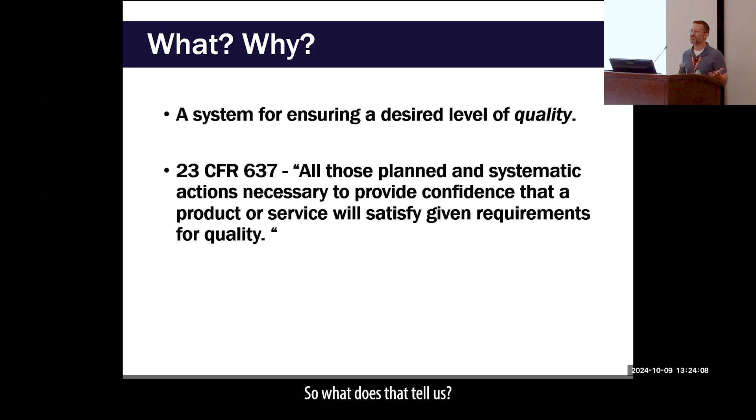So, what is quality assurance? At its simplest, it is a system for ensuring the desired level of quality required by the Code of Federal Regulations. The FHWA requires all of this, and it's all of those planned and systematic actions necessary to provide confidence that a product or service will satisfy given requirements for quality. So what is that telling us? It's basically just a fancy way of saying we want to get what we pay for.

So we make references to sampling and testing. It is not just sampling and testing, but this is an entire program. It's a cycle here. Your personnel, are they qualified? Do they know, have they been trained? Is that training documented? Do they have what they need to take proper samples and run these tests?

Is your equipment in good working order? Has it been calibrated? Do the people know how to run the equipment? And is all that documented? And then finally, the eyes on the road at the end. A passing test does not substitute for a failing inspection. So the inspection is just as important as any of the testing that you're going to run.

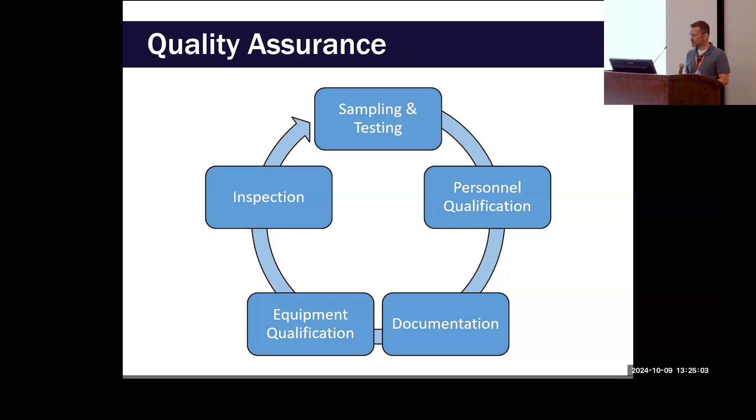So we have a lot of references to QA. We'll start with the Louisiana standard specs. I always make reference to section 106, which is control of materials. It gives you kind of a 30,000 foot overview of who is responsible for sampling, who's responsible for the materials, what certificates are required on certain parts of the job.

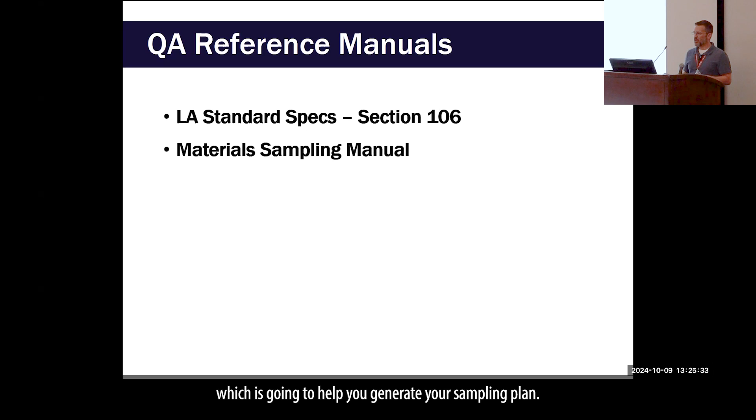The materials sampling manual is going to help you generate your sampling plan. This is divided up by contract item and gives you frequencies, the requirements of how much you sample, when you sample, and any remarks in there. Again, this will help you generate a sampling plan specific for your project, which is going to be based on the bid estimates in your contract.

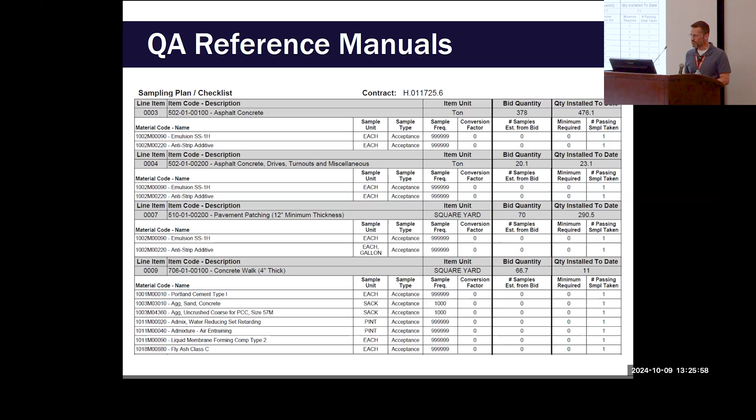We make a lot of references to AASHTO specifications, ASTM specifications, which are all national. We have some of our own procedures detailed in the testing procedures manual, or if we make modifications to some of these national tests, then we may write our own TR, we call them, which I found out means testing and reporting. That was a fun question to get into. But we will make a TR for those modifications or our own test procedures.

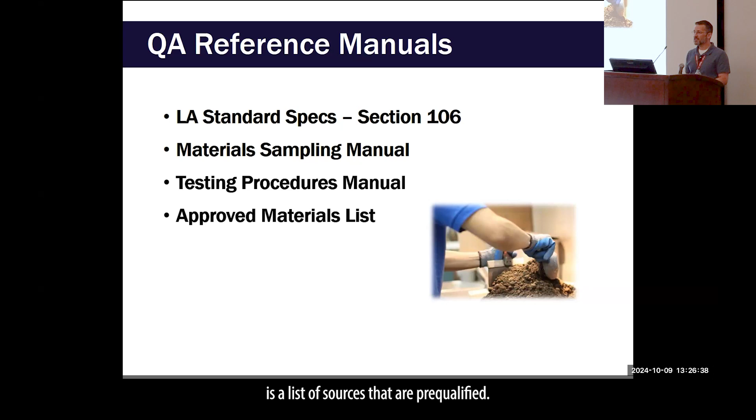The approved materials list is a list of sources that are pre-qualified. It's not blanket approval. We'll still have to use the sampling manual to test them at the proper frequencies. But it shows that these are a number of companies that are capable of producing materials meeting our specifications, but again, not blanket approval.

And then at the end of the project, the audit of testing and materials, which is EDSM III.5.1.2. This used to be called the 2059. If anybody's worked on those before, we just changed it to audit of testing and materials.

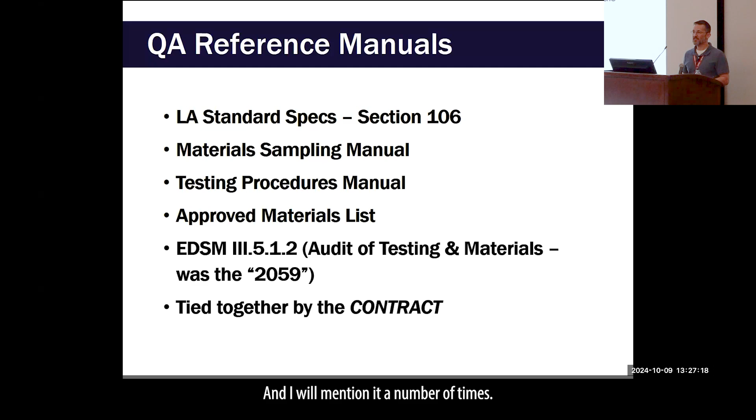And these are all tied together by the contract. And I will mention it a number of times. And as Mary said, read your contract. The contract will have specification changes. And it actually says it right here, the standard specifications together with any supplemental and special provisions.

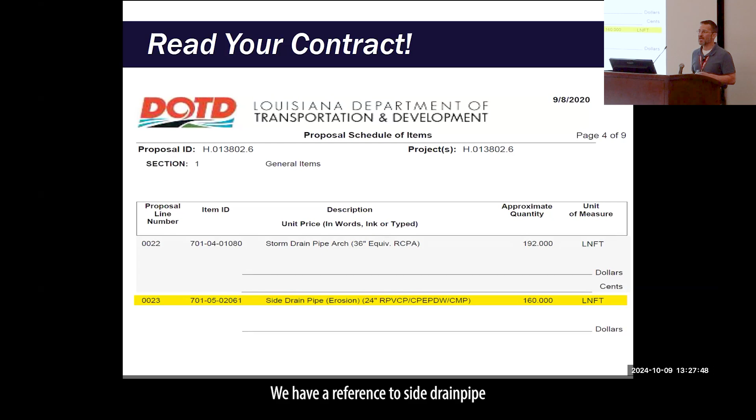And sometimes we will make changes here in just a proposal of a schedule of items. We have a reference to side drain pipe, and that makes reference to double wall polyethylene pipe. So if we look in the contract, we have a special provision that says for culverts and storm drains, that 701 item, use of polyethylene pipe, polypropylene pipe is an acceptable substitute. And then we have the material specification 1006, which has been modified to include the polypropylene pipe reference to AASHTO M330.

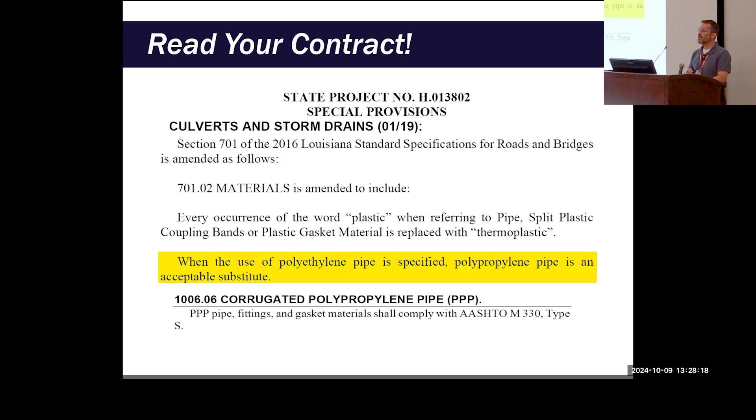And in some cases, there's a lot of changes. We may have a complete revision of the specification. The Purple Book, Part 5, is no longer valid. There was a specification change in August of 2018 that completely replaced Section 5. So if you have anything asphalt, don't go by the Purple Book.

It is the shellback's turn.

What do you think? False? Okay, click it. False, correct. Excellent.

Is this recording loud enough? I can't hear anything, but. Yeah, you're good. Okay, keep going.

You're good. So all of our contracts have the Buy America iron and steel provisions, including coatings. And this, of course, leads into the more fun Buy America, Build America.

That's changing a number of things. This covers steel and iron still, but it also covers construction materials and manufactured products. And depending on what category these materials are in, manufactured products, I think, have to be 55% of the cost manufactured in the United States, and construction products are 100% manufactured. I can't remember either. There's a whole bill and law on that, and it explains it clear as mud.

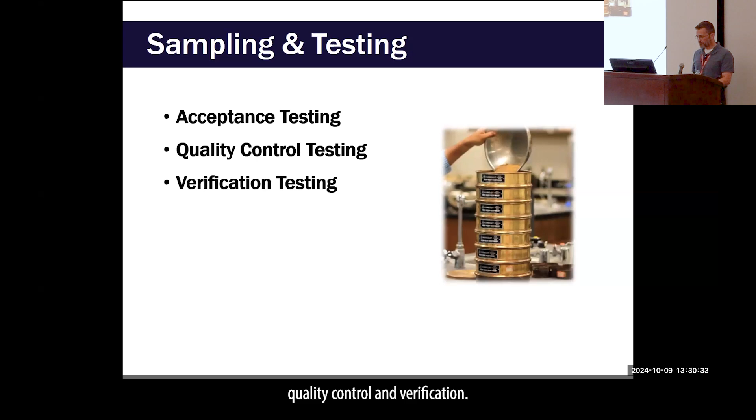So we'll go a little bit into sampling and testing. The three main types that you'd be dealing with will be acceptance, quality control, and verification. So acceptance testing is performed by DOTD, or our owner representative, which would be you, and that's what's controlling pay.

In some cases, material may pass, or if it's not passing, to what degree is it meeting the specifications? Is it something that we would apply a pay penalty to, or remove it and replace it with passing material? Depending on the degree of departure from the specification, it could be a very expensive fix. So another reason of ensuring that everybody knows what they're doing, that all of your equipment is in working order.

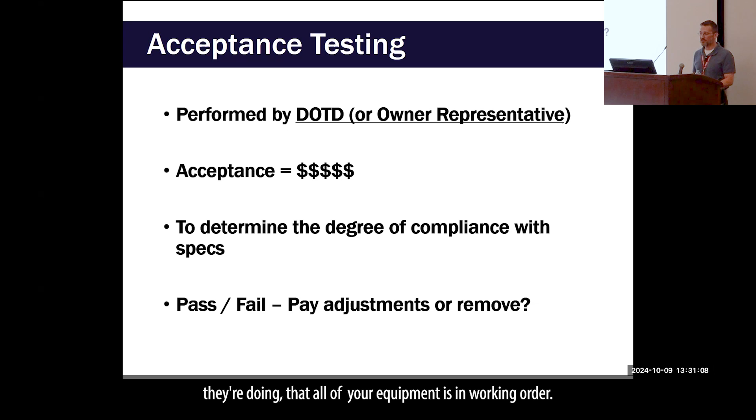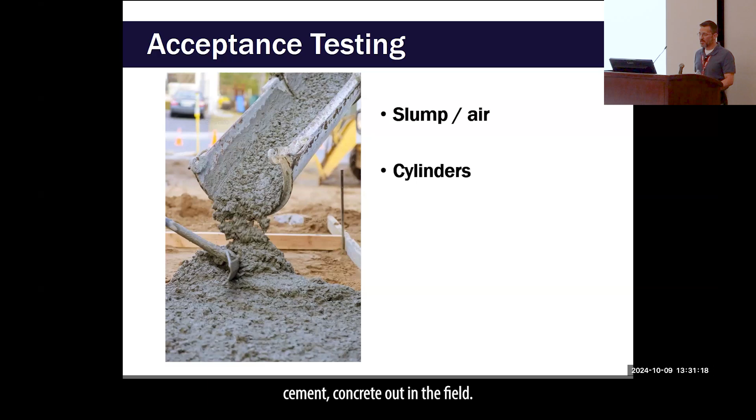So some examples of acceptance testing would be slump and air on cement, concrete out in the field, and making those cylinders. In some cases, we would accept materials on a certificate of delivery, which means that the batch that's arrived on your project has been pre-approved by the department.

So quality control testing is done by the contractor, and this is the way he adjusts his process to keep within the specification limits. He can make adjustments as necessary to control its quality and hopefully give us a more consistent product. If a process that he's doing is more variable, he may need to run more tests to ensure that he stays within the tolerance limits.

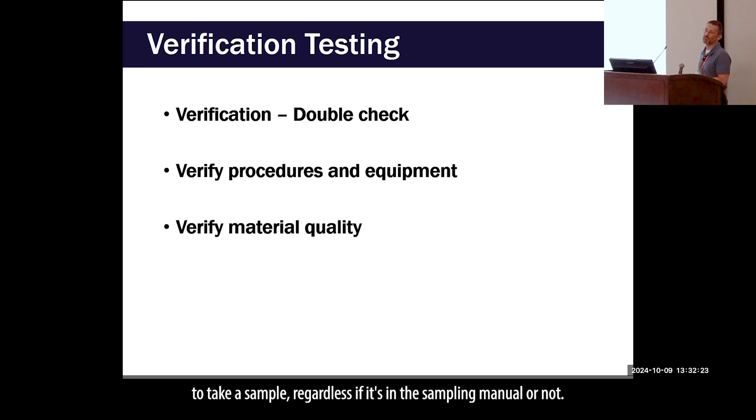And then verification testing is our chance to have a second look. This would be if we have questions on procedures, equipment, the quality of the sample. Did something not look right? We always have the ability to take a sample regardless if it's in the sampling manual or not. We can always stop and say, we want another sample of this. And if something's not verifying, that may warrant additional testing or investigation.

And some examples of this would be emulsified asphalt, tack coats. If you're dealing with this, you'll generally be accepting the materials on a certificate of delivery at the project site, but we take one per project just to maintain a view of the material quality.

And one thing that I want to note here on tack coat, we've got a nice laydown of the tack coat across the entire roadway. The distributors are set really well, so this guy's got it right. If we test this material and it's the best material that you've ever had, but the contractor is spraying it in streaks down the roadway, then all of that testing does absolutely no good.

So again, passing test doesn't substitute for a failing inspection. Your inspectors are just as important in this process as anybody else. So, and again, if something's questionable, question it. Take those samples and make those calls.

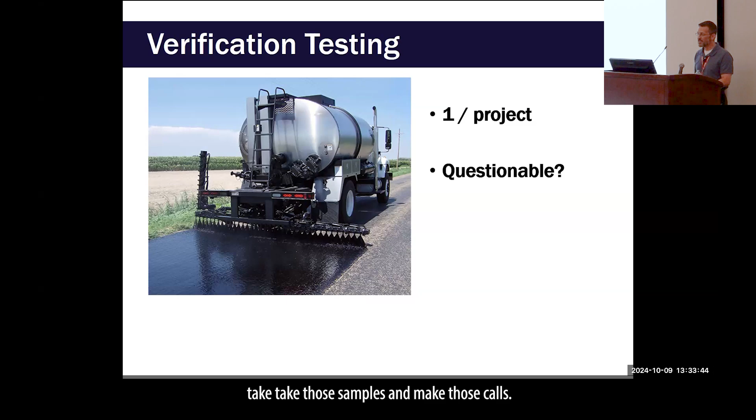Another, Portland cement. Yes, we accept these on certificates of compliance, but we still take one per project just to keep everybody honest. And the verification testing is generally done by DOTD, but again, you can always take a sample if anything is in question.

Okay, it's the urchin's turn. The QC, quality control testing, is performed by the contractor to monitor, etc. What do you think? Last row. True. We saying true? Okay, they're saying true. They are correct. Very good.

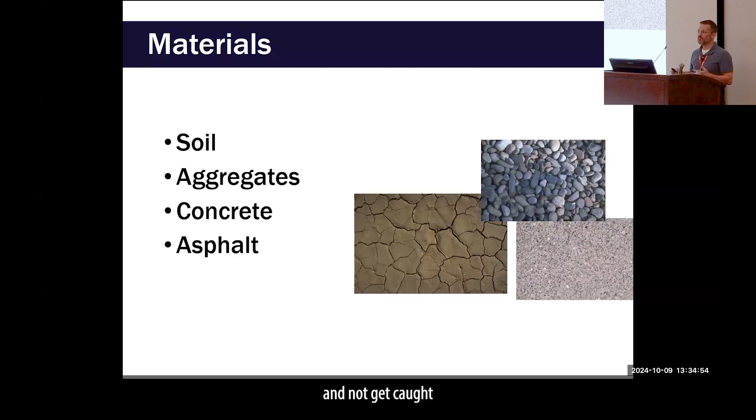So I'm going to get into a little bit of materials. I'm prefacing this, you may not have all or any of these materials on your project. This is just to kind of give an overview of the scope of the different testing that may be involved in your projects, things to think about to stay ahead and not get caught last minute needing test results.

We have a lot of different tests that are performed at different labs for various reasons. So again, read your contract beforehand and get an idea of this. Like concrete and asphalt, if you're dealing with these, we require everything to come from certified plants, which DOTD certifies every 2 years.

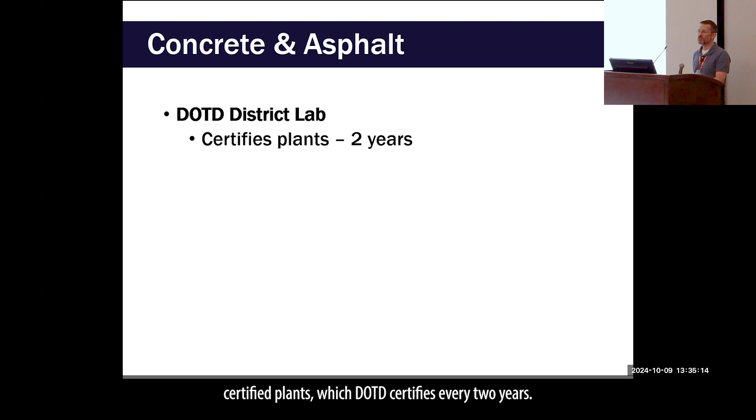Our district labs would approve mix designs for asphalt and concrete. And sometimes those can take some back and forth to make sure everything's correct there.

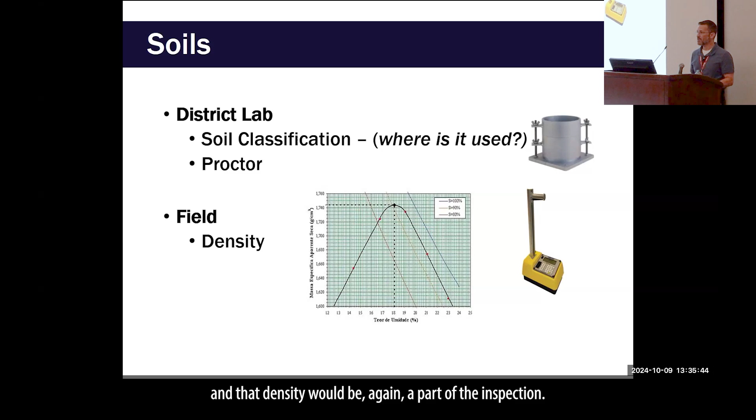Our district labs would perform soil classifications and moisture density relationships, Proctor. But then we'll take a density in the field, and that density would be, again, a part of the inspection. You've got something like a pipe, and you want to make sure that the haunches of that pipe have proper density around them. If you don't have good compaction around them, you're not going to have a good pipe installation, especially with plastic pipe.

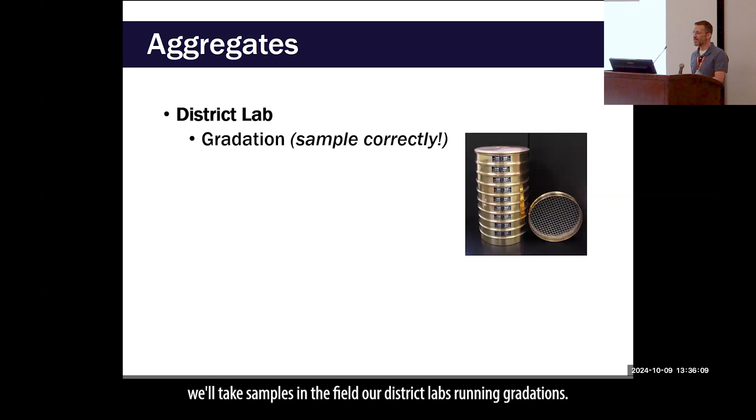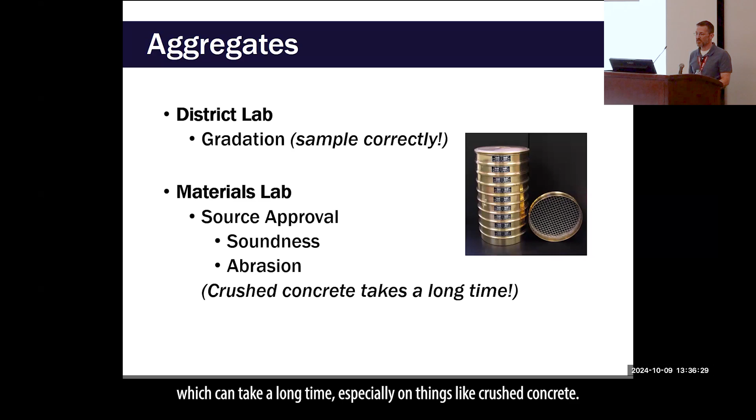So for aggregates, we'll take samples in the field. Our district labs run gradations. The sampling manual will have typical testing times on some of these, so you can get an idea of how long some of these materials would take. If there's a new source or something that's really questionable, the materials lab would test for source approval and run things like soundness and abrasion, which can take a long time, especially on things like crushed concrete. So again, plan ahead if you need to do any of these.

For concrete, our district lab runs compressive strengths. Again, in the field, you'll do slump and air for acceptance. And then if DOTD is involved in some of the testing, there may be cement, fly ash. That would all go to the materials lab for verifications of any of those.

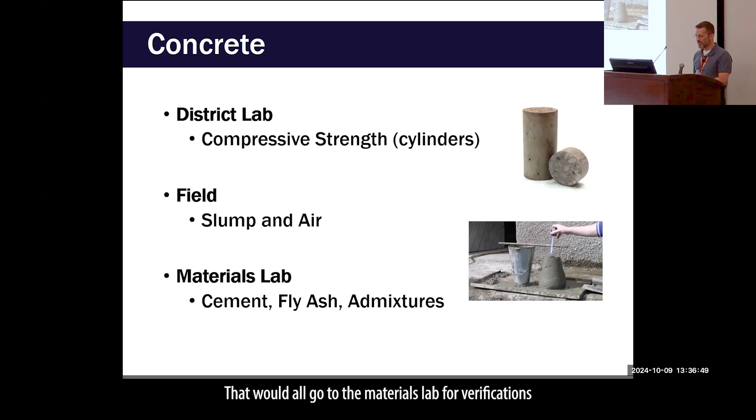Question? A lot of times JMFs and concrete mix designs are being approved prior to NTP or anything like that, or at least early on in the project. If we were the LPA's project engineer, are we responsible for approving those mix designs?

DOTD is our testing laboratory, for the testing of materials and the approval of mix design. I think that will be something discussed at a pre-con or before everything is signed over. I'm not exactly sure who would be responsible for that, but I would imagine that will be something discussed beforehand.

We've had some contracts for CE&Is where the owner representative is responsible for everything, and other times they're sending it to DOTD. So I think it's kind of however it's determined prior to the start of the project. I'm not exactly sure how to answer the question on that one, but I think that it's to be determined. Thank you.

So district labs will run grade check for asphalt cement by doing viscosity. And then in the field, we'll take cores for density, and after the project is over, they're going to run smoothness.

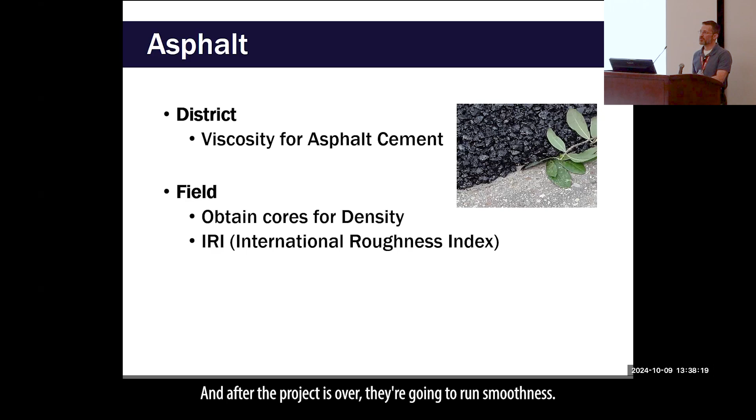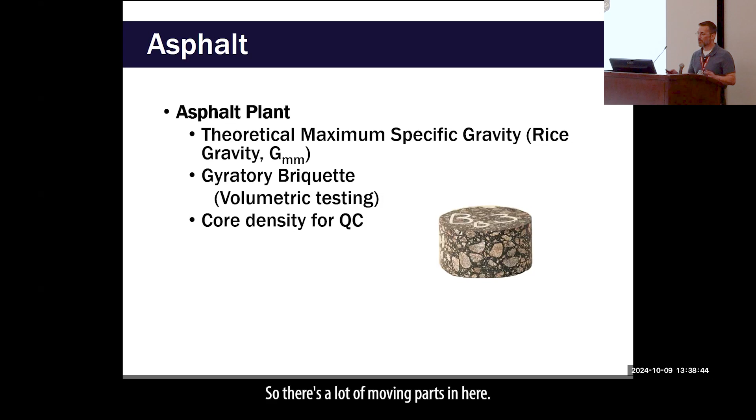The asphalt plant, there's a lot of QC data, QC testing that goes on to check that process at the plant. There's verifications done by DOTD at the plant. And then the cores that are taken for acceptance are sent to the district lab or sometimes run at the plant, but it's run by DOTD. So there's a lot of moving parts in here.

And then at the end, we've got the International Roughness Index, the IRI. And that's a team effort that's run by the contractor, submitted to the project engineer, and the contractor is certified for profilograph using DOTD to certify them.

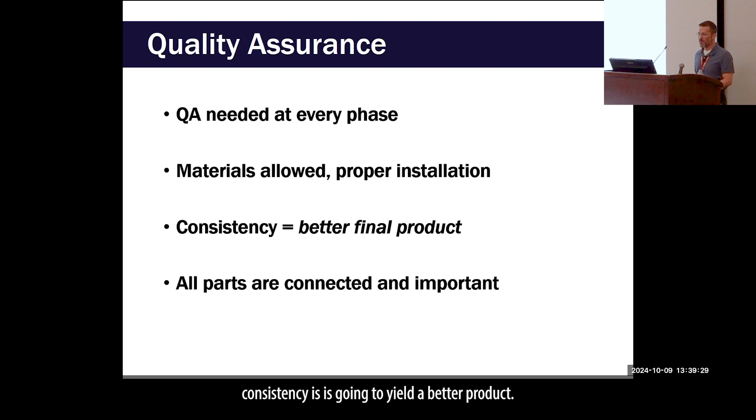So this is just kind of an idea that there's quality assurance at every phase of the project. It's all important. Be aware of what materials are going to be allowed on the project, what's a proper installation. We want better consistency, which is going to yield a better product, and all it takes is one broken gear to stop the machine. So everything is important. It all goes together.

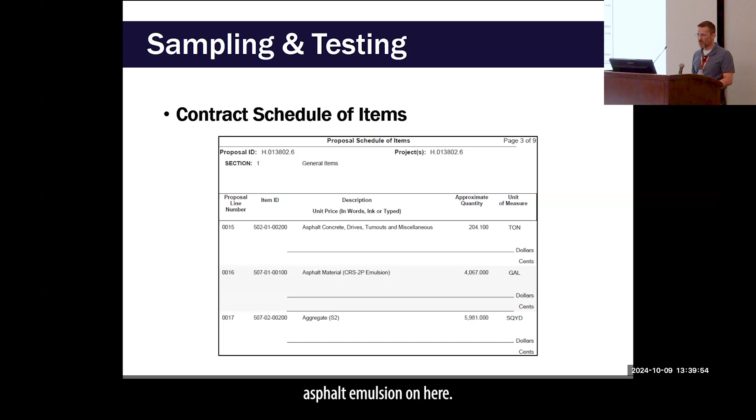I'm just kind of looking at here, we've got an example. Here's a contract schedule of items. We have, showing that, we got asphalt emulsion on here. We have aggregates. We have asphalt concrete.

So if we look at this, you can tell, if you look at the sampling manual and you connect the dots, you've got plant QC. The contractor's going to have to run plant QC on his asphalt concrete. We're going to have verification samples required in that, and then there's going to have to be field cores for acceptance for densities. And the aggregate, again, is your contractor using an approved source? Does he have a buddy down the field with a stockpile that isn't on our approved list? So is that going to have to be approved prior to him doing that?

So now you start getting all of this information. Okay, how do you record it? Matt kind of went into that. I'd like it to be Headlight, I think, depending on how Headlight turns out, but for right now we're still

dealing with Site Manager. It's kind of a work in progress on both ends. Site Manager is our database of record right now. Headlight will... are they working with Headlight now, or do you know? Oh, yeah, it's in progress. It's not done yet.

Matt and I were talking about it, a little bit of a state of flux. Matt said something about January potentially, and that seems ambitious, I thought, but he said to pilot the materials part in Headlight on some DOTD projects. That's what I thought he said, but from what I've seen, that will be very ambitious, but we'll see.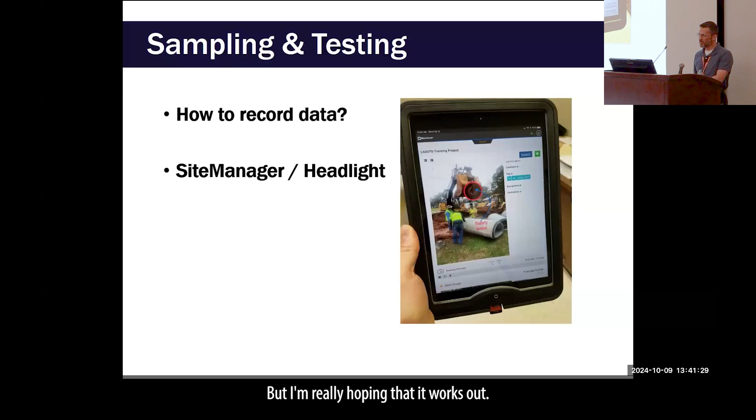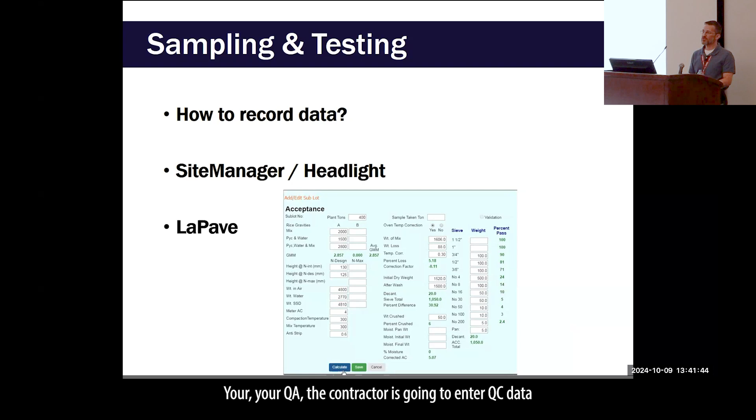I'm really hoping that it works out. So the other part of this for asphalt and concrete especially is going to be LaPave. LaPave is tied to Site Manager, and this is how you would handle your mix designs, your QA. The contractor is going to enter QC data into LaPave. If your people are not signed up for Site Manager, if they're not enrolled in that, and especially with LaPave,

talk to our automation team. We have training and stuff that they can give you on this, but just in general, from our main website, Business Construction Services, there's a DOTD system registration for Site Manager, some information that you'll fill out here. For LaPave access, there's this plant designer down here, and then choose your company name, or if it's not, you can click on it and register the company there.

Again, talk to our automation team. They will be able to walk you through this process, help get you set up, and give you training on Site Manager, give you training on LaPave. There's a lot of good information that they can help you with there, make it a lot easier.

So when you start taking these samples, we need to know some basic information. What are we testing? How much does it represent on the project? What are we testing it for? Is this an acceptance sample? Is this for pay? Is it for verification? Where is it coming from? And if it's a named product on the AML, what product is it? All of this gets entered into this very simple form here.

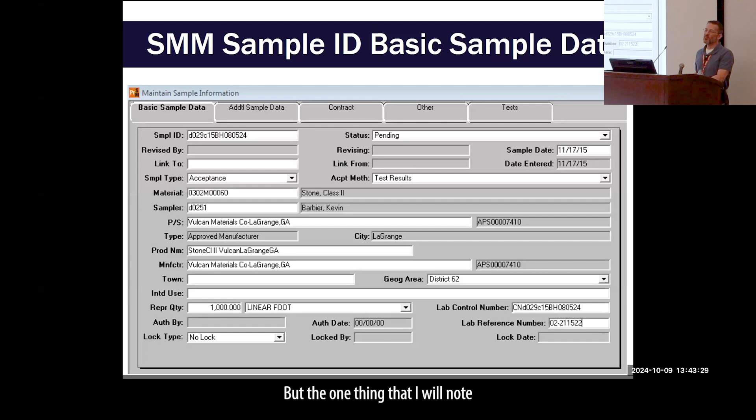Any of you have not worked with Site Manager before and have to, y'all are going to love this. I won't go into filling this out. I think Matt hopefully already did enough, good, somewhat. But the one thing that I will note is that when you get to the materials selection, test selection phase, we've set it up to accept default tests, set up to have the most general tests necessary for those projects. So unless there's something specific that you need for a verification, accept the default tests. It's much easier to add a test than it is sometimes to delete them.

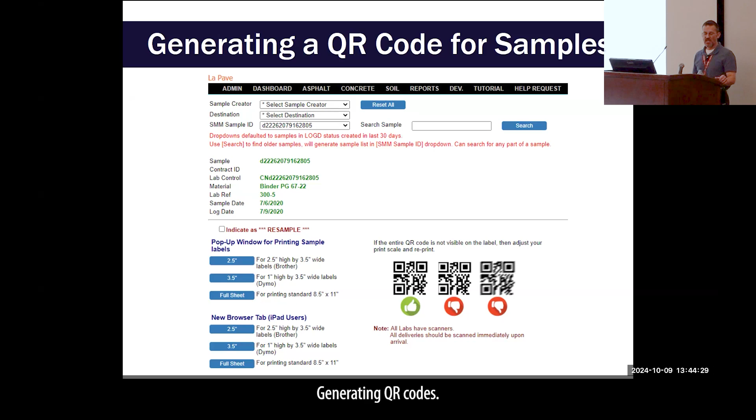So if materials are going to be sent to DOTD for testing, then for chain of custody, we're asking for everybody to use QR codes. And if you have access to our intranet site, on the Site Manager Materials Reports, there's a QR generator, but from our main Materials Lab website, sample QR code generator. Once you've created your sample in Site Manager, you'll be able to get to this page here, generating QR codes. And if something is a resample, there's even a box here to indicate that it's a resample.

That can give it a little higher priority. There are options to print on 2.5 and 3.5 inch labels, or full sheet. So depending on your setup, again, our automation team can give you recommendations of the right printers to use, which ones are the best quality to use. And I don't think they're that expensive, so it seems like slapping a sticker on these samples is quite helpful.

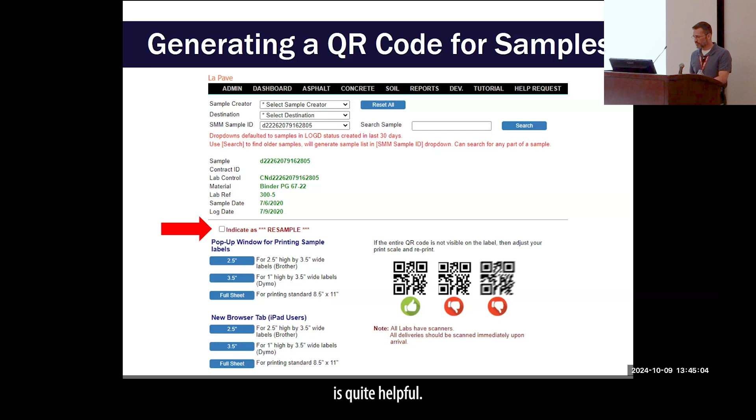So now we've got this proper information. We know what we're testing and why we're testing it. Just as important is to make sure that we've got that sample in enough time to get your test results prior to needing it on the project, and that it's representative.

We've got this QR code to help with the chain of custody. We take that sample, and we don't want to have the asphalt core rolling around in the back of a contractor's truck or somebody transporting it to a lab. The cylinders that you've taken so much time to prepare properly, and then they're thrown in the back of a truck or mishandled, and then our results aren't necessarily valid anymore. So we need to know who's going to be testing the samples, and how much time you have.

We have DOTD sampling procedures referenced from the sampling manual that cover equipment, handling, and labeling. Do you need, in this case for an aggregate, a shovel and a shield? You don't want to take a sample off the top of the stockpile—it's not representative, and that can delay your samples. Are you taking this from a stockpile, a barge, or a windrow somewhere? All of this should be covered in the sampling procedures.

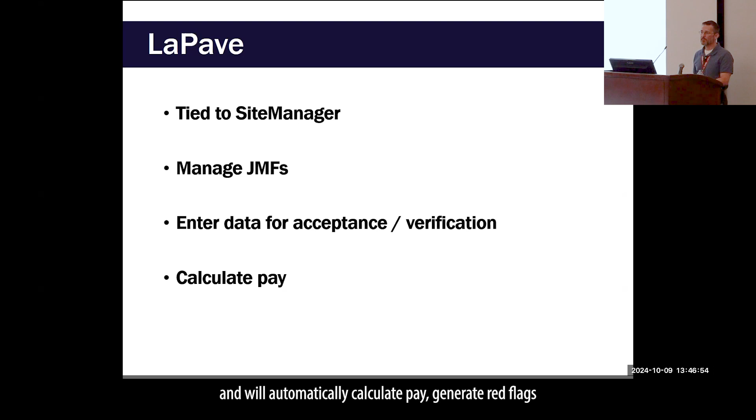So I mentioned LaPave, and that's tied to Site Manager. This is how you will manage your job mix formulas and enter data for acceptance verification. This is where the contractor enters data for QC, and it will automatically calculate pay and generate red flags for information you'd want to go back and look at.

These are just screenshots from LaPave. We've got all of these mix designs for concrete. If we clicked on one of those, we would get all of the constituents other than the aggregate—this is the cement and admixtures for a cubic yard of concrete.

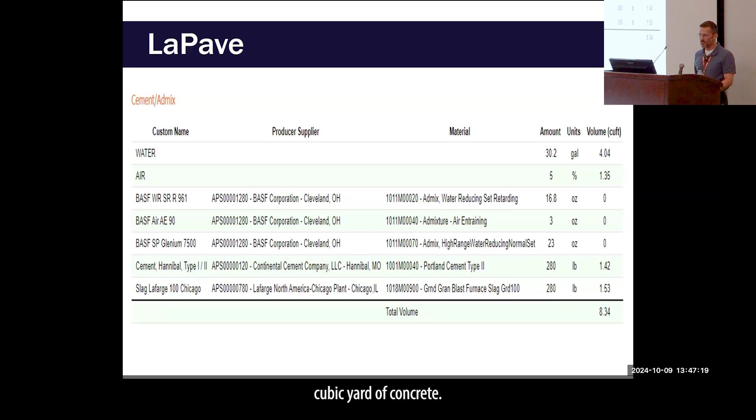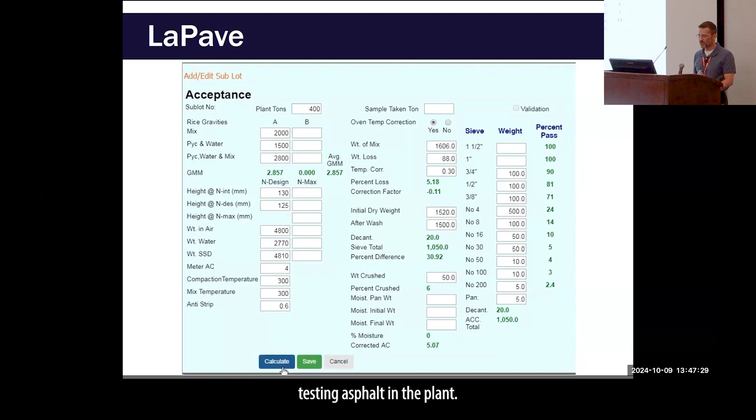And then on the asphalt end, there are screens that let you enter your gradations and all the information you're going to get when testing asphalt in the plant, and then for densities as well.

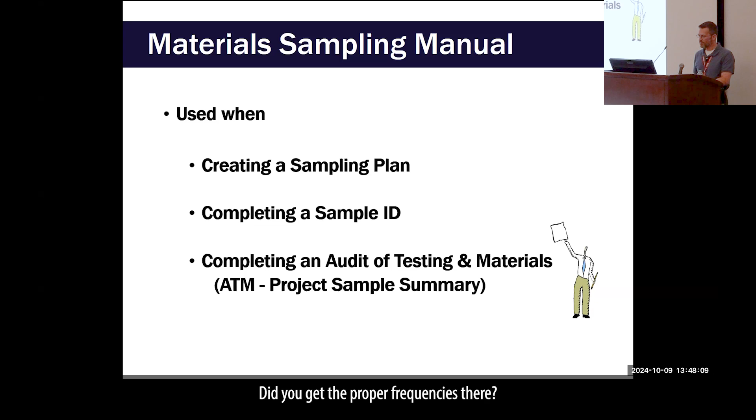So you know that you're going to test—how do you know how much to test? The material sampling manual is used when creating your sampling plan for your specific project, and how to complete a sample ID: what it's being tested for, who it's being sent to, and the quantities. When finalizing your project for the audit of testing and materials, did you take enough samples? Did you get the proper frequencies? This is arranged by contract item.

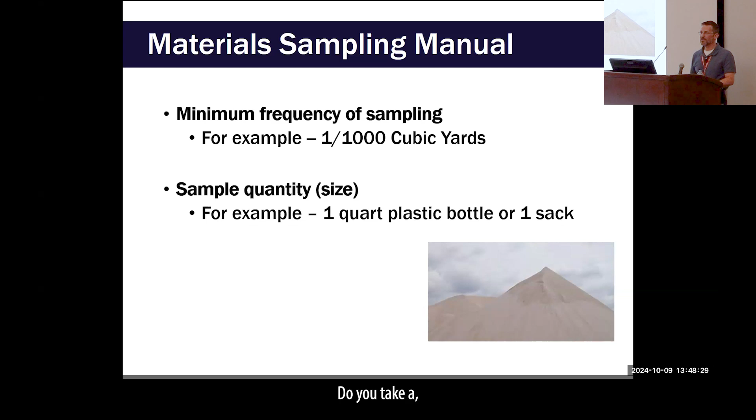So asphalt concrete is item 502. It gives you the purpose, acceptance, QC, verification, and how much you take—1 per 1,000 cubic yards, 1 per project. Do you take a quart, a gallon bottle? What certificates are required with it, what documentation is required? Certificate of delivery, analysis, and compliance are three different types of documents, and they all mean something slightly different.

And then who gets copies of those—in general, one goes for the project file and everything else can be distributed electronically. So that makes it nice now.

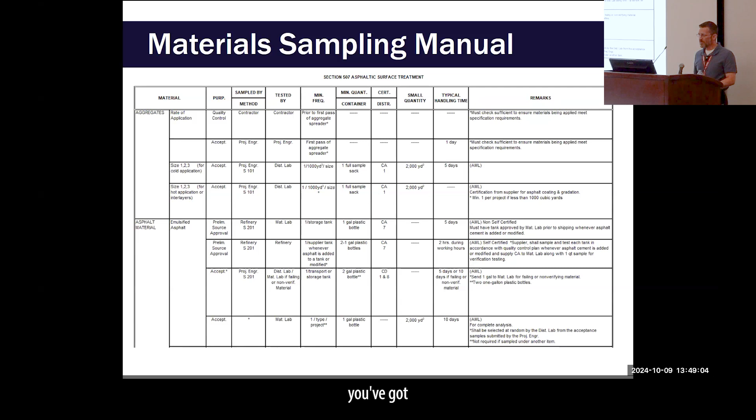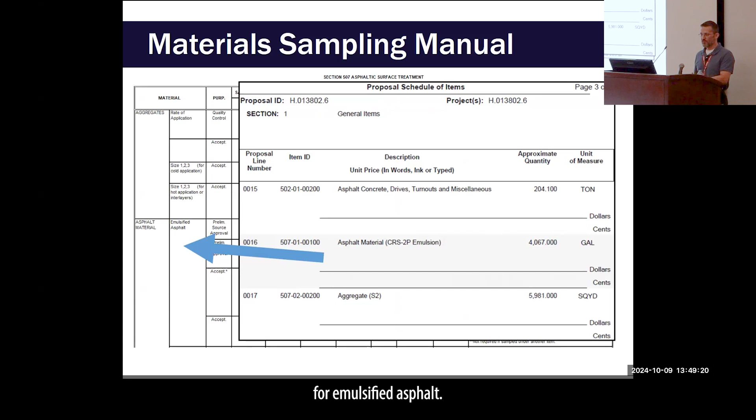Going back to item 507, asphaltic surface treatment—if we take an example of that same project we were looking at earlier, you've got a proposal schedule of items with asphalt materials, CRS2P, and aggregates for that asphaltic surface treatment. So we can match the asphaltic surface treatment section for emulsified asphalt here, and we've got the aggregates. This is how you connect the project contract with the sampling manual.

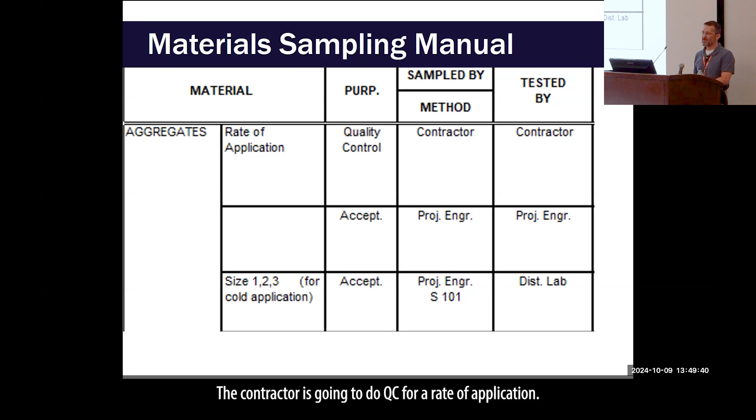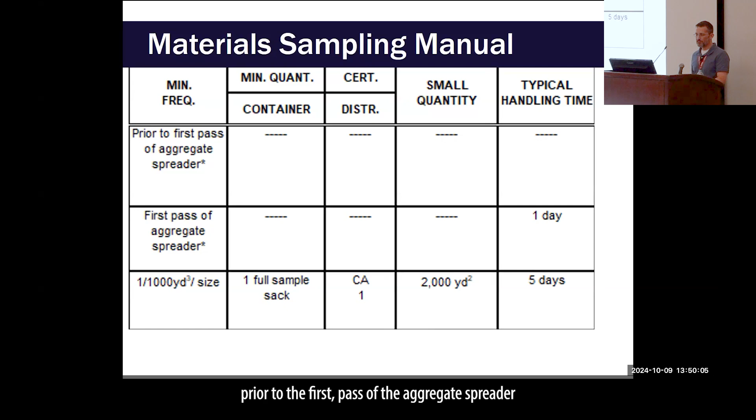Just looking at the top line, this is what information is in here. For those aggregates, the contractor does QC for rate of application, and the project engineer accepts based on that rate of application as well. Then there's a gradation for the aggregates, taken by the project engineer and run by the district lab. So this is the whole 'who is responsible'—the contractor runs his calibration prior to the first pass of the aggregate spreader, and the PE accepts it based off the first full pass.

And for the aggregates, 1 per 1,000 cubic yards per size of aggregate, they take a sample and send a sample sack to the district lab. That needs a certificate of analysis where the contractor is saying, here, I've certified that this material is good, and here are the results showing it. So it's not just a trust me.

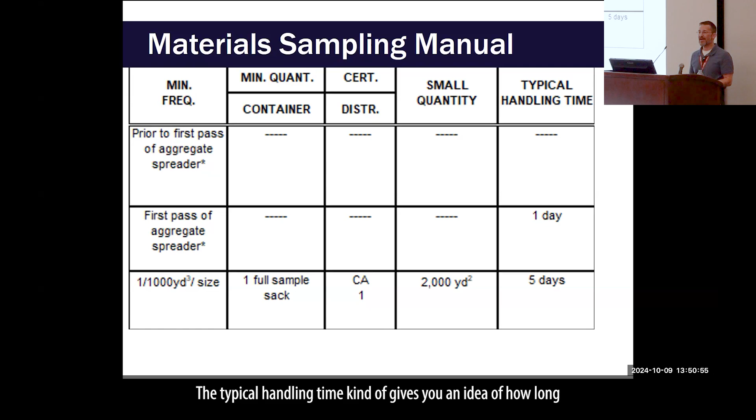There's a small quantity rule in here: if you have less than 2,000 square yards of that item on your project, you may not need to take a sample, but it's always good to take at least one just to keep everybody honest and do our due diligence. The typical handling time gives you an idea of how long it should take to get results back—it can be more or less depending on what kind of load is in the lab, so it just helps you plan ahead a little.

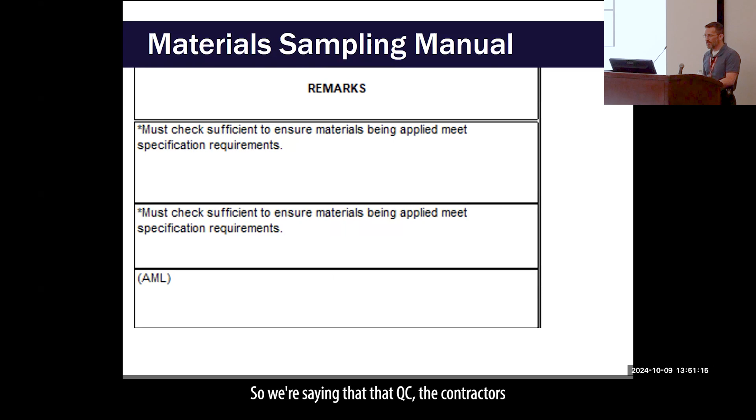And then the remarks column gives you any information you might need that's not in the tables themselves. We're saying that QC—the contractor's got to check sufficient to ensure he's meeting the specifications. And if you see something that says AML, those materials need to be listed on our approved materials list.

All right, is it the Scallywags' turn? What do you think? False? Are you sure? Do you really have to take material samples? This could be a trick question. You never know. False. Good answer.

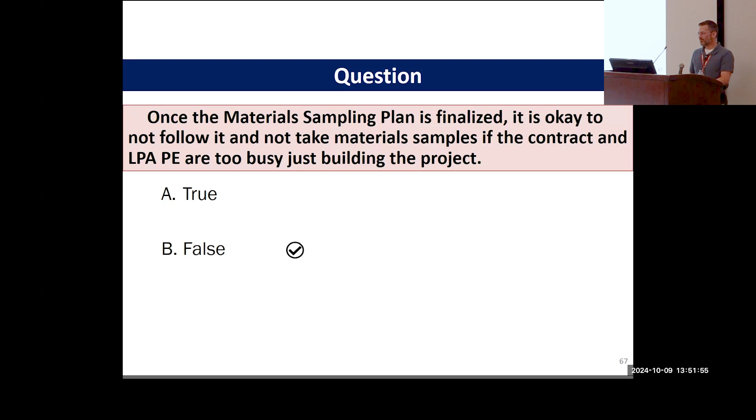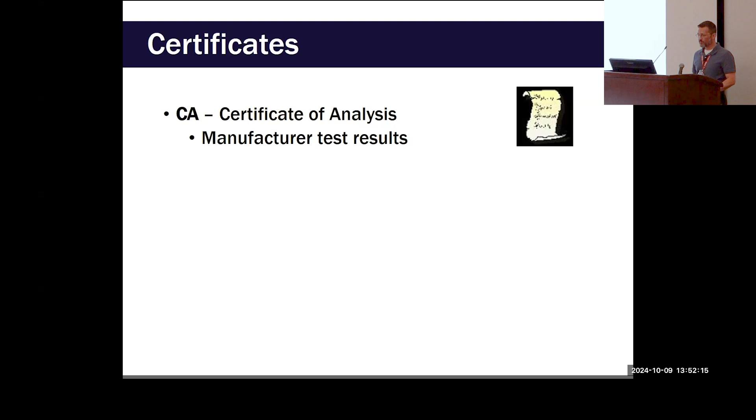So I mentioned these certificates. Certificate of analysis is the manufacturer's or supplier's test results. This represents the actual test results for the batch you're getting on your project, not just typical results. Certificate of compliance is kind of a 'trust me' — they're saying we're complying with your specifications, and here's a piece of paper that says we are.

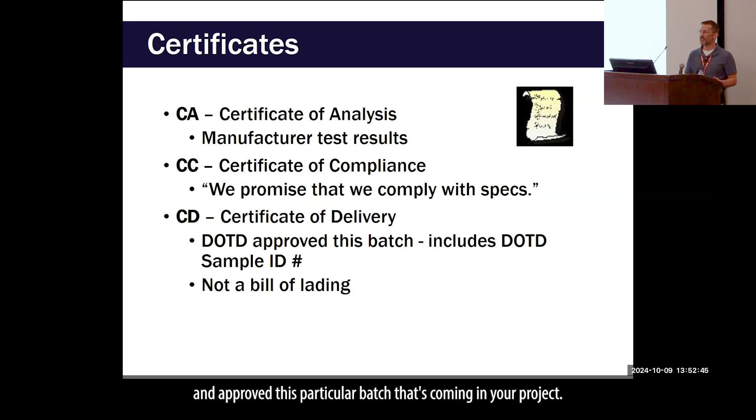Certificate of delivery is a DOTD form, and that should have a SiteManager ID on it that you can tie back to the original testing, showing that DOTD performed whatever test or inspection on this material and approved this particular batch coming into your project. So it's not just a bill of lading — this is DOTD's approval of that material.

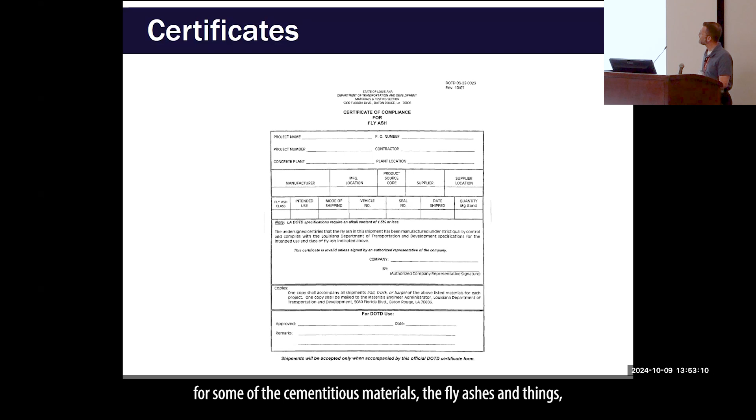For certificate of compliance, some of them we have a DOTD form just to keep everything consistent for some of the cementitious materials, the fly ashes and things, but there's no testing that's been done on these for those particular batches.

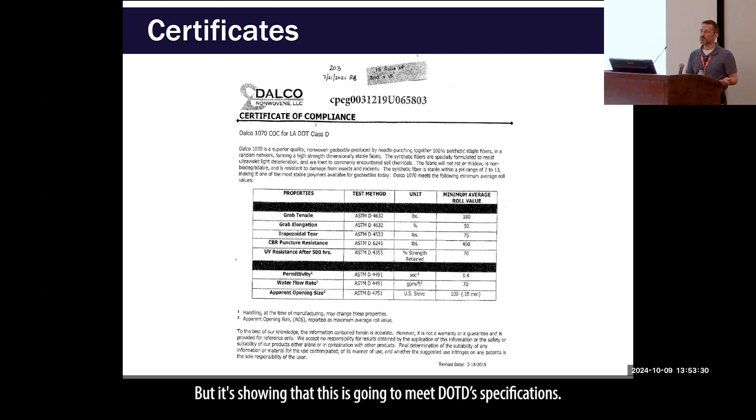For something like a geotextile here, a certificate of compliance will give typical results, but it's showing that this is going to meet DOTD specifications if you compare the documents there.

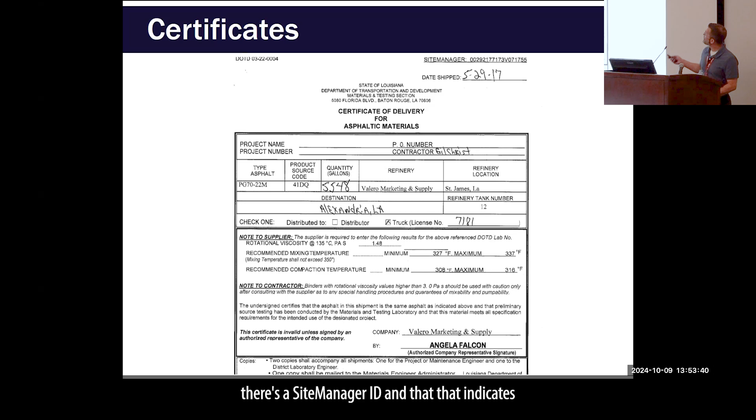And then a certificate of delivery — this is going to have up at the top a SiteManager ID, and that indicates that 5,548 gallons of asphalt binder has been approved by DOTD. So when you get it on your job site, this piece of paper is saying it's been tested.

So I mentioned the distribution. We used to have codes of who it goes to. Now pretty much everything, the project engineer is going to get a copy and keep it in his QA documentation file, and everything else can be submitted electronically. Makes things a lot easier.

The approved materials list, again, is a listing of materials and sources that have been pre-approved, pre-qualified, and are capable of making material that meets our specification. You still need to test it according to the sampling manual — it's not a blanket approval, but these are companies we've said you can use on our projects.

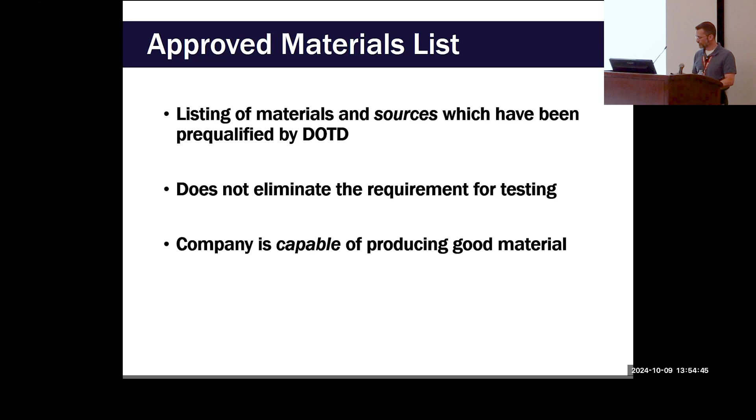Sometimes the testing may take 3 years to complete, so we don't want to do that on a routine basis. These are searchable on the Materials Lab website by material or by source, and in some cases for aggregates, we'll give gravities and absorptions that can help with mix designs.

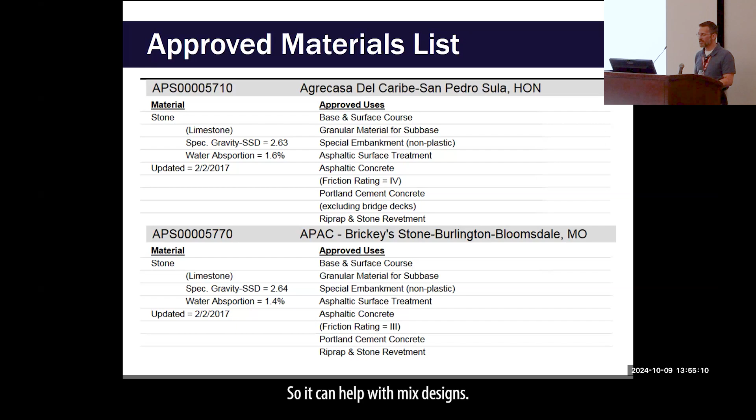So you're going to use the sampling manual to create your project-specific sampling plan, and this will show for your project which materials you're going to be allowing, which ones you've selected, and the item quantities that come from the bid estimates.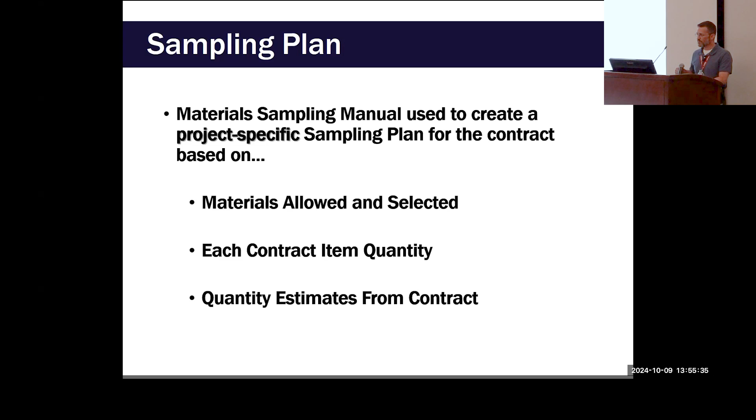In Site Manager we have a report that will allow you to create a very nice sample report, a sampling plan. This is much improved over some of the originals. It will give you bid quantities, keep track of quantities to date — how many samples were estimated as necessary and how many you've taken to date — and pull comments and instructions from the material sampling manual.

So you can use this, or you can make your own. A lot of the district labs still like to use Excel, and that's perfectly fine. Whichever tool makes it easiest for you is perfectly fine.

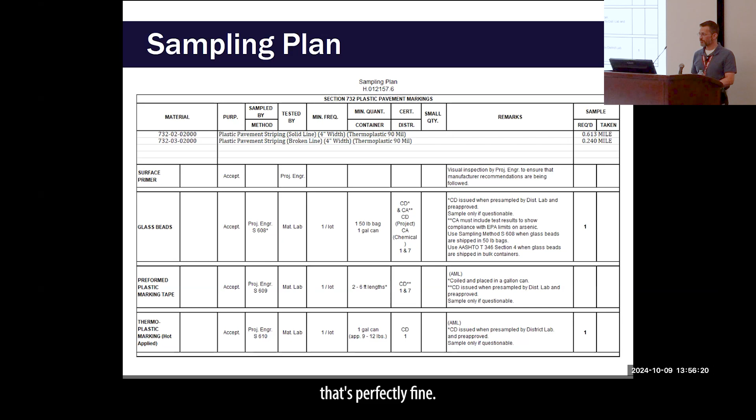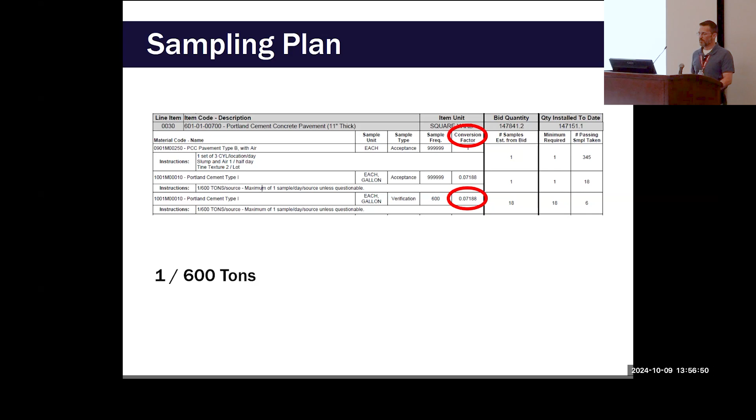Sometimes we need to convert units. We've got Portland cement concrete, 11 inches thick here, and your item unit is in square yards. So you may need a conversion factor because now you're looking at 600 tons, 1 sample per 600 tons of your cement. How many samples do you need for 147,000 square yards of pavement? There will not be a test on this, but you can convert tons of cement to square yards of concrete.

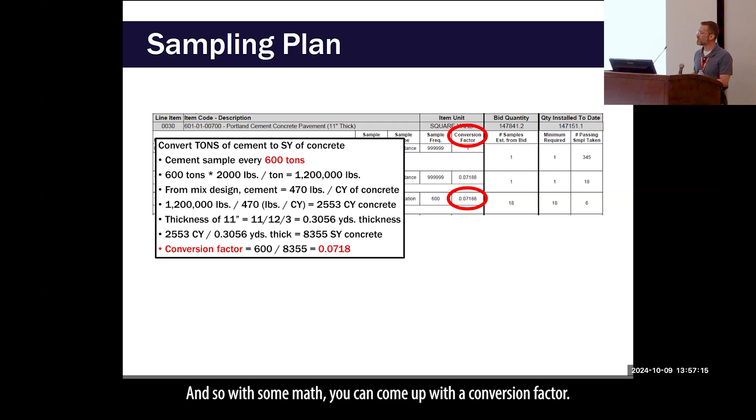Part of this is from LPA. You'll be able to get information from the mix design, knowing that for your particular mix design you may need 470 pounds of cement per cubic yard of concrete. With some math, you can come up with a conversion factor, and in this case you come up with 17.7, so 18 samples of cement at 1 per every 600 tons, to cover your 147,000 square yards of concrete.

So that was what you'd need for verification samples on your project to maintain what's required in the sampling manual.

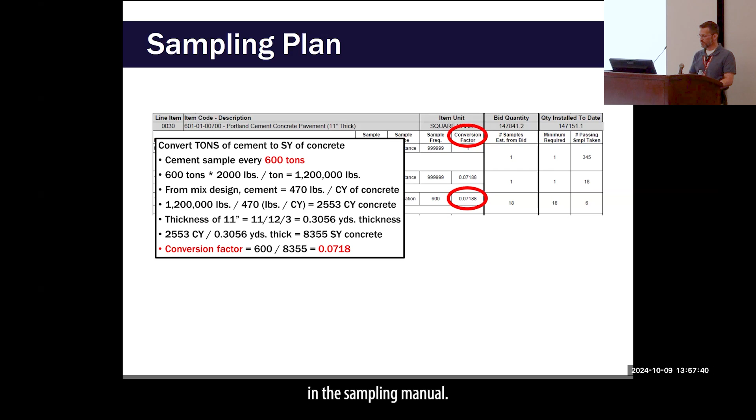Should there be a test on that? That's the next question, right? Oh, yeah, there is.

During the project, you're going to keep all these certificates, all of this information in your quality assurance documents file. You're going to have your sampling plan with your updated quantities, all those certificates that come in. Especially be aware of your failing materials, because you'll have to have a disposition on those at the end of the project.

And these are filed by contract item. In addition to all of this, pretty much anything that involves quality assurance, your work zone letters, mix designs, pavement, roadway reports, the third-party testing. If you send it to a third-party lab that's not going to be entered into Site Manager, all of that would need to go into your QA documents file.

So now you've got all your testing done, you've taken all your samples, you haven't missed anything, right? Don't wait until the end of the project to find out that somebody out in the field hasn't been taking samples. They needed 1 per 600 tons, and they took 1 for the entire project.

Can you repeat your statement about the third-party testing? I want to make sure I heard you accurately.

Just that if you're sending materials to a third party, not DOTD, you're sending it to a testing lab somewhere to have material run for acceptance, for DOTD's use. They don't have access necessarily to Site Manager.

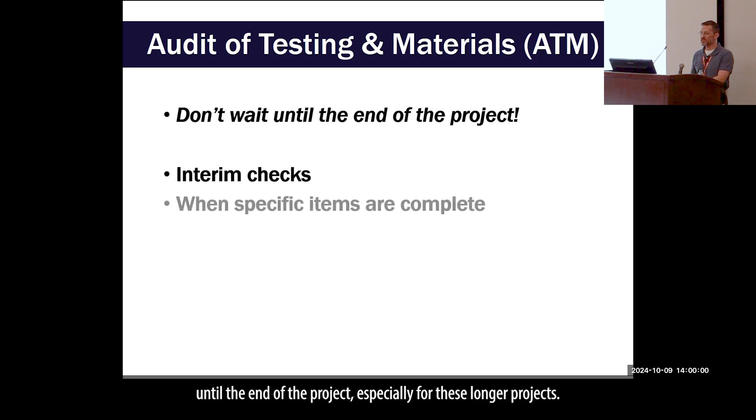But again, as you go through this, your summary at the end of the project, you don't want to wait until the end of the project, especially for these longer projects. Do some interim checks when specific items are complete, or every quarter.

Keep in touch with your DOTD liaisons, keep in touch with the district labs, your inspectors. Be particularly aware of failing samples, and just be sure that you're taking what you need when you need it, things are working properly.

Just don't wait until the end of the project to start getting all this information together, because if you come up with those surprises, you're going to have all kinds of fun.

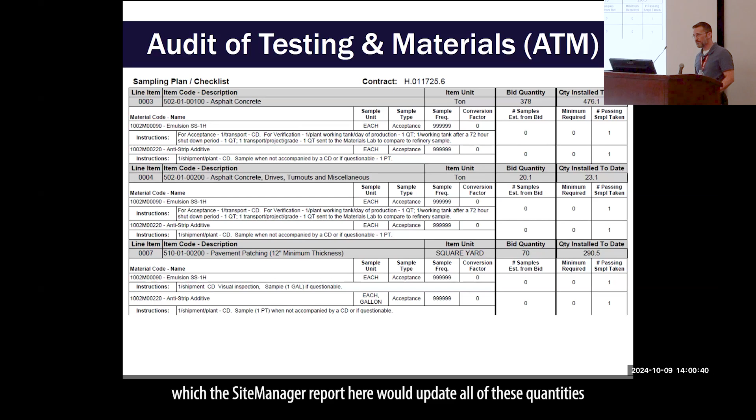So the ATM is going to include your sampling plan with your final quantities, which the Site Manager report here would update all of these quantities as the project progresses. And your mix designs, your certificates, all these reports.

Kind of looks like the QA documents file is most of what you need for the audit of testing and materials. So if you've got a good documents file all along, then your ATM at the end becomes a lot easier.

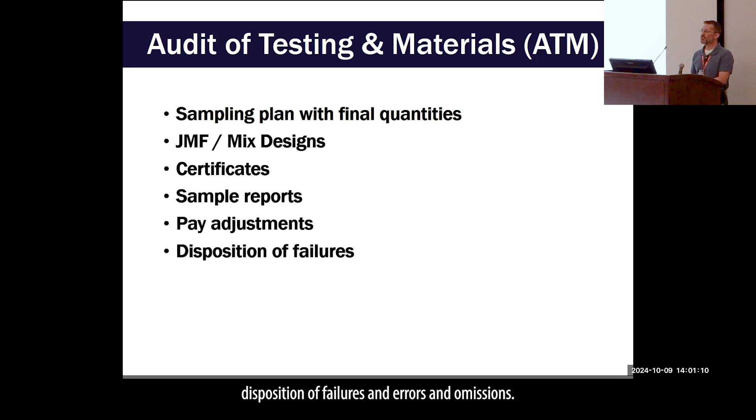But you've got pay adjustments in here, disposition of failures, and errors and omissions. We know not everything is going to turn out right.

Here was that original bid, and there was some extra quantities that appeared on your project. They ran more patching than they expected. So did that change how many samples you would need to take, and were those actually taken for those overruns?

And on the first page of the Audit of Testing Materials report, we have boxes that you can check for disposition of failing tests and if there's errors and omissions.

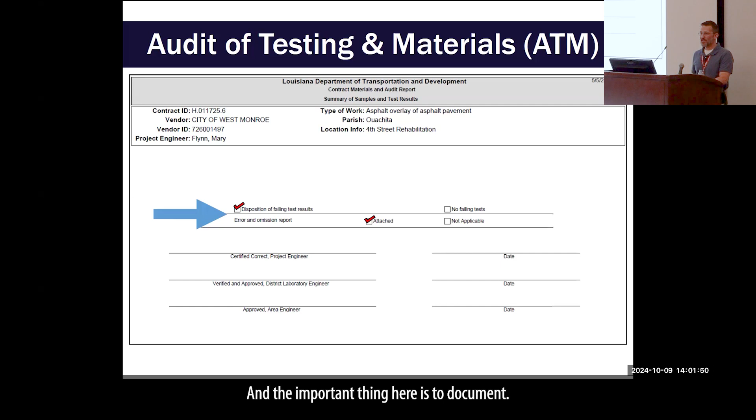And the important thing here is to document. We've got failures on this project, so how were those handled? What did we do with those materials?

In some cases, reworked a stockpile. Subsequent lab samples passed, and here are the references.

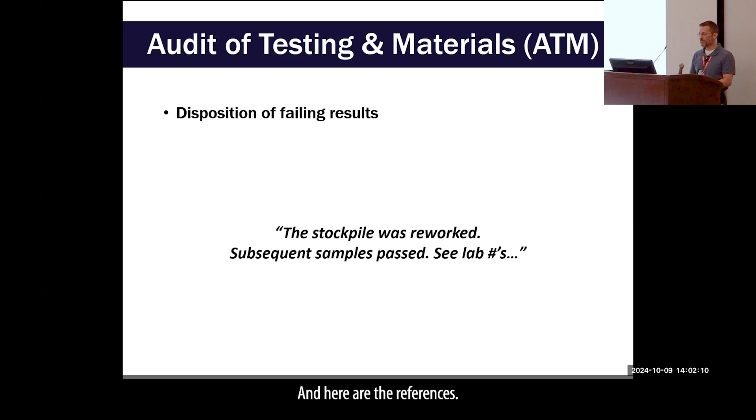If something was missed due to a miscommunication, nobody was at the plant that day, and so we didn't take samples for that particular lot.

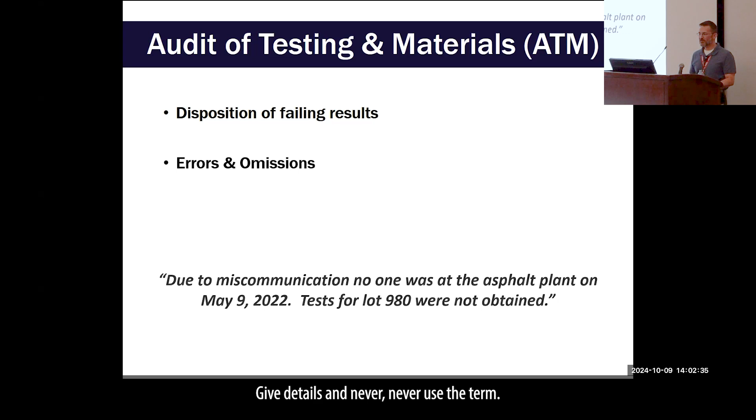What would you tell a newspaper reporter if they asked why you had failing material on your project, or if you missed something? Give details, and never use the term, we waived the sample.

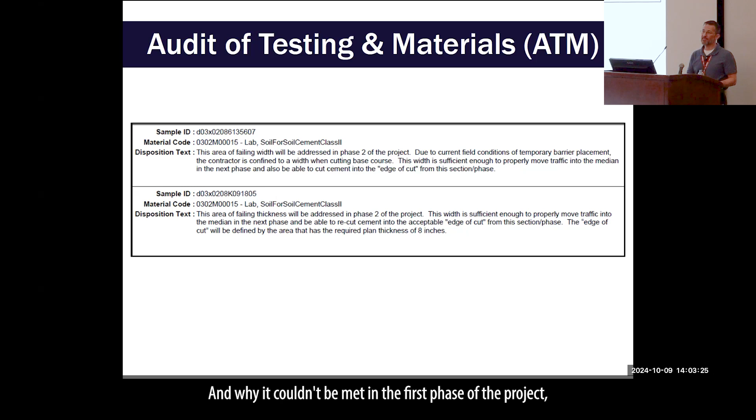Showing that everything has been verified. Here somebody gave the detail that they had areas of failing width that didn't meet specification. They're going to address it in the next phase of the project, explain why it couldn't be met in the first phase, and why they're leaving it in place and why it's not a problem.

And I've mentioned it, inspection is just as important as any other part of QA. It's an integral part of the entire project. A passing sample does not override a failing inspection. Are your people trained? Do they know what they're doing? Is your equipment in proper working order? Has it been calibrated? And again, have you read your contract?

Last question. Okay, sorry, I was writing down notes for myself.

Barnacles, if I gotta fix this. It is okay to wait until the project is almost complete to begin gathering the information for your audit of testing and materials. False. What do you think? False. Good answer, I didn't catch that. Yeah, I know, I need to fix it. Okay.

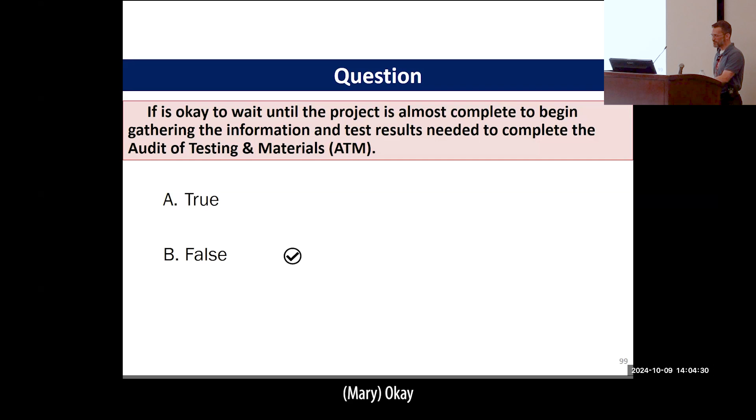Y'all are ready for the math test, right? Yep, next one.

Is DOTD still using ProVal to analyze IRI? I think so. I'm not 100% on that, I'd have to ask Melinda at our office, but if you want to email me, we can find that information out for you.

Okay, I'm curious, thanks. So the site manager will generate the minimum sampling requirements based on the items? If you enter in, I think right now it starts off with no samples required for anything, and you'll go in, or one per project or something, but you can go in and put in a conversion factor, and it will take your bid quantity and convert it to the number of samples. So you'll have to build it, but that was easier.

I think originally everything was on, and you'd have to go in and start turning things off, and it was a nightmare. So they changed it to where everything is defaulted to zero, and you go in and enter in for the materials that you're going to use.

Okay, but it still would flag if this item requires testing. That's the idea. And they did a lot of work to get that sampling plan to give us more information. It seems like just having the bid quantity installed to date, the instructions from the sampling manual, the frequencies and all in there, seems like it's a lot more information for you out there than before. Hopefully the one in Headlight is going to be even better.